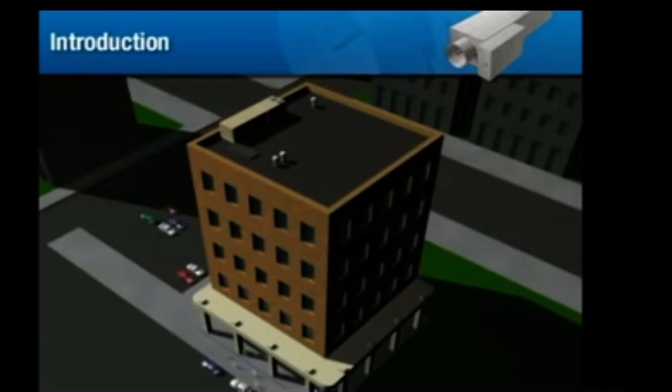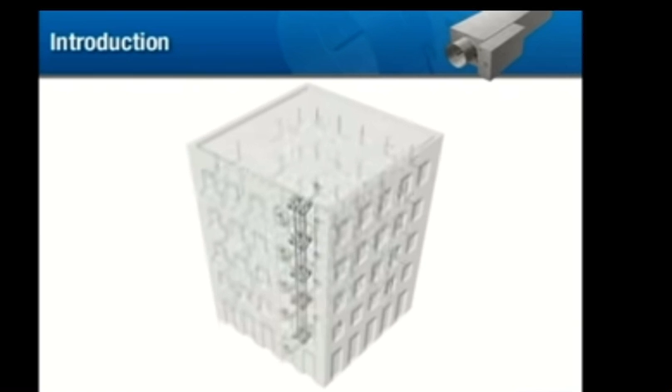The modern commercial or office building consists of many sophisticated systems. These systems include foundation and support structures, electrical and lighting, and plumbing and fixtures. Another major part of any building that is often taken for granted by its inhabitants is the HVAC system. HVAC stands for heating, ventilation, and air conditioning.

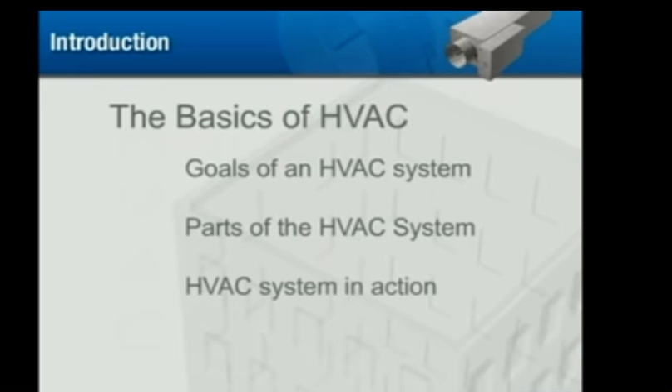In this unit, we will identify the purpose and goals of the HVAC system, describe basic HVAC parts, and describe how these parts work together.

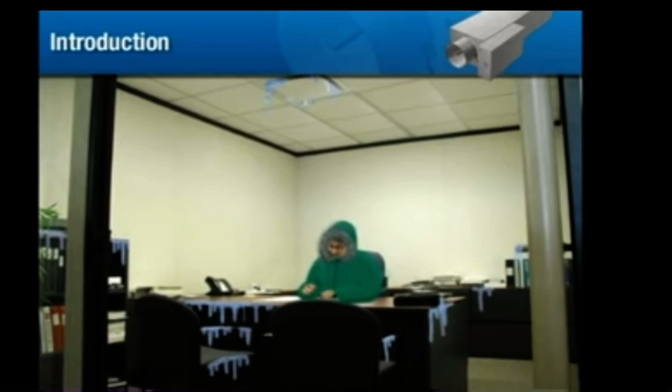Air quality is an essential consideration in maintaining the productivity, comfort, and health of the occupants and should not be trivialized. If air quality and temperature are not maintained, occupant comfort in the workplace can suffer, directly affecting productivity and morale.

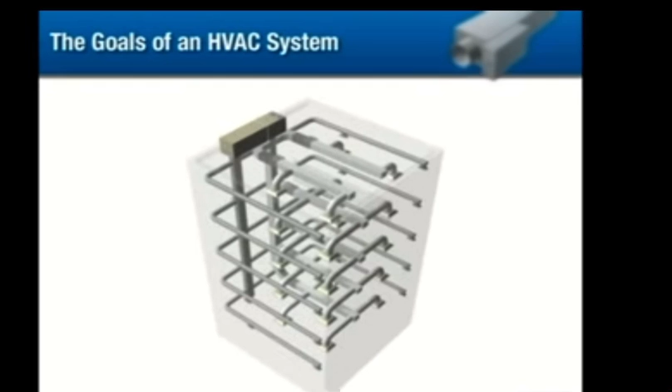The goals of an HVAC system. When examining the design of an HVAC system, we must remember the various roles that the HVAC system plays.

We all know that when we're cold, we turn the thermostat up for more heat, and when we're hot, we turn the thermostat down. So the HVAC system keeps us comfortable by adjusting the room's temperature.

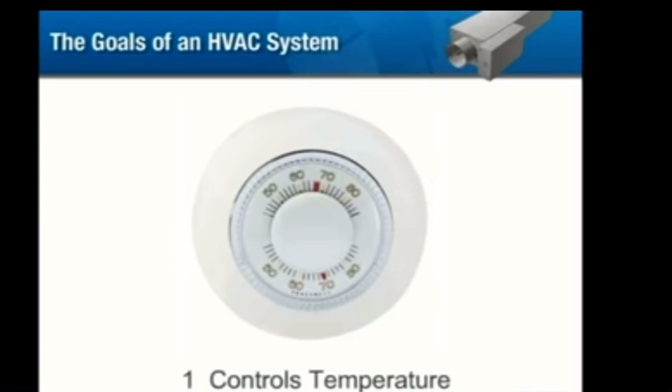But equally important, the HVAC system must keep occupants comfortable by supplying fresh air to a room. If we introduce a significant proportion of fresh exterior air and alleviate carbon dioxide buildup, occupants experience better health and performance gains. Studies have shown a direct link between CO2 levels and short-term sick leave in office workforces.

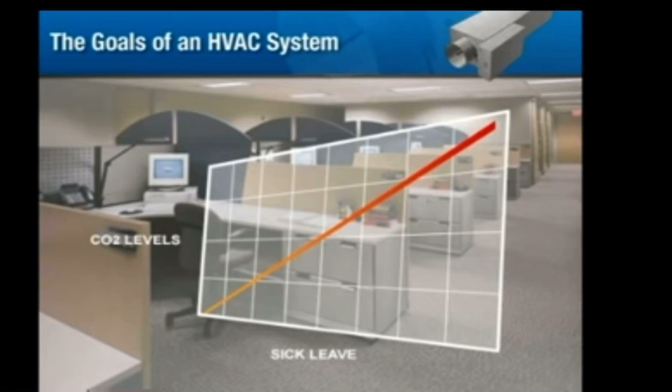However, our concerns regarding the HVAC system and occupant health do not end here. In heavily air-conditioned, energy-efficient environments, recirculated conditioned air can carry contaminants which contribute to respiratory illness. It is the HVAC system's job to remove contaminants and dust from the air using filters at various stages.

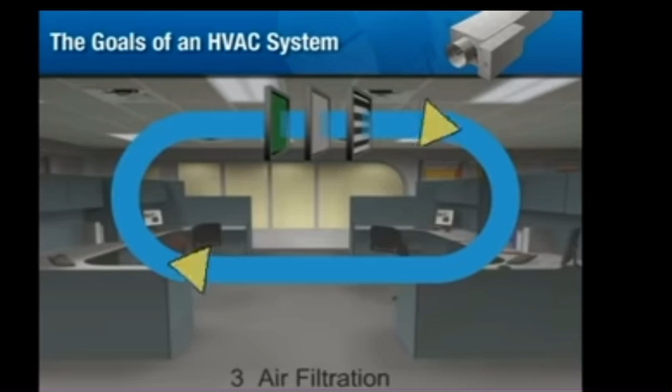As important as this consideration is in an average office or commercial building, this feature is critical in facilities that contain clean rooms, medical facilities, or hazardous materials.

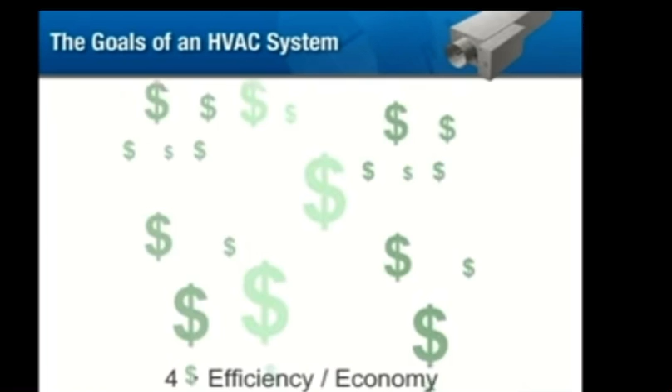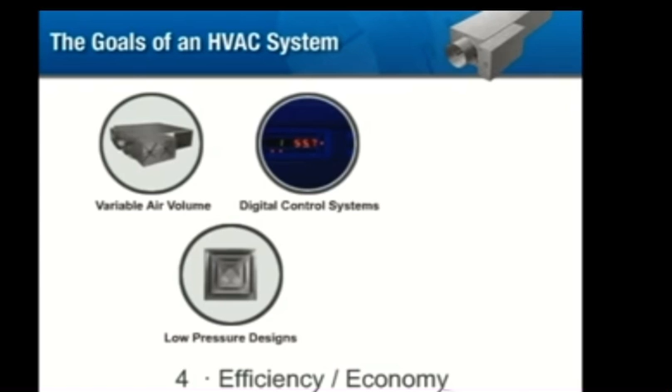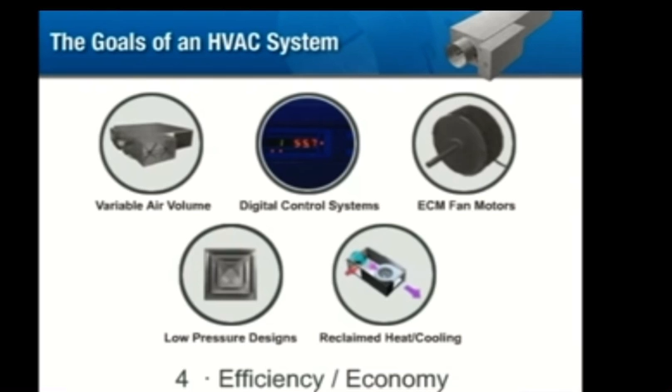Finally, with the spiraling cost of fuel, HVAC systems must also be efficient and economical. Energy-efficient HVAC systems might incorporate variable air volume designs, components designed for operation at low pressures, digital control systems, mechanisms for reclaiming heating or cooling benefits from recirculated air, and high-efficiency ECM fan motors. Many Price products are designed specifically with energy efficiency in mind.

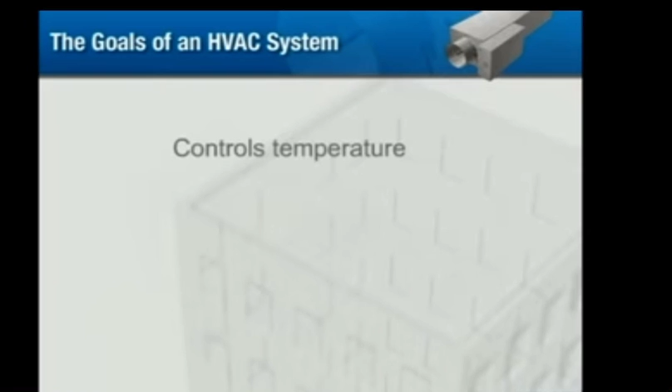By understanding the importance of occupant comfort, we realize the significance of the HVAC system in a building design. It's responsible for controlling the temperature in the environment, providing fresh air to the occupants, filtering out dust and contaminants, while operating in an energy-efficient and unobtrusive manner.

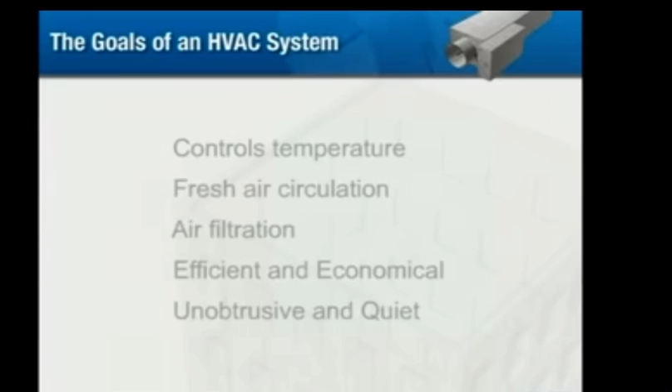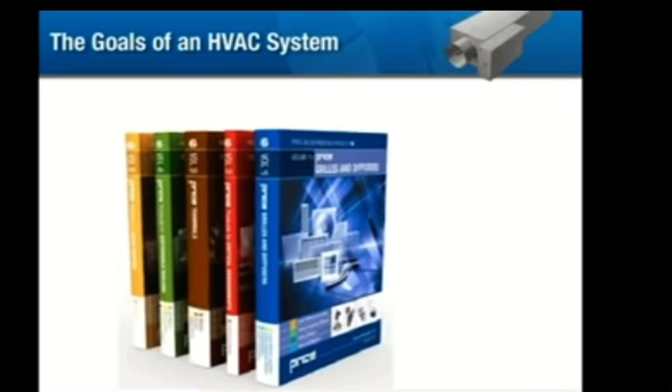The following section covers the different parts that make up a basic HVAC system. Once we understand the range of components involved, we can better understand the reasons for choosing system components from Price's extensive product line. The parts of an HVAC system.

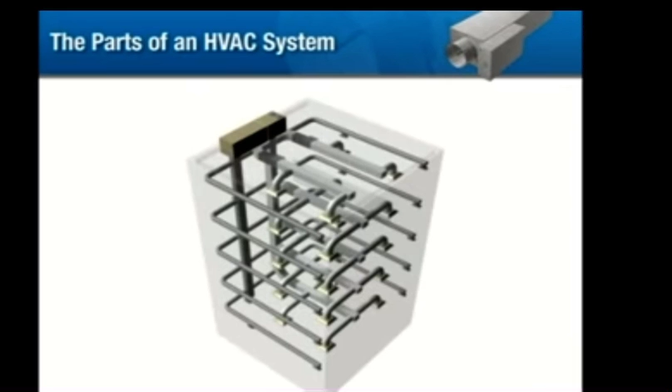The HVAC system installed in a commercial or office space differs greatly from the heating and cooling system that you might be familiar with in your house. In your home, your heating system is set up to deliver warm air during the winter and cool air in the summer. It does this using a furnace or an air conditioner and a common set of ductwork.

When your thermostat detects that your home is too cold, it sends signals to the furnace, which then delivers warm air simultaneously to all parts of your house.

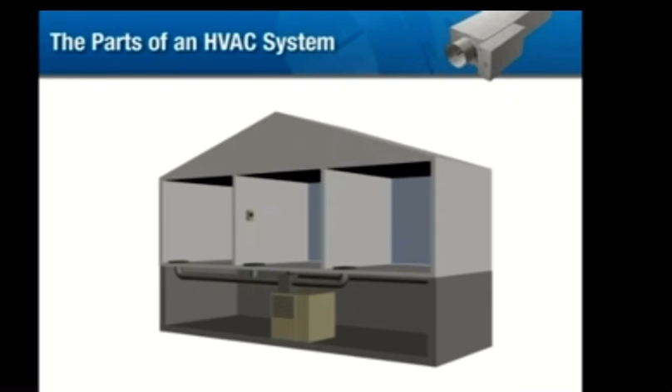Note that it is typical to have only one thermostat, and it does not account for temperature variation in any other rooms. Likewise, in the summer, your thermostat will detect when your home has become uncomfortably warm, and it will signal your central air conditioning system to deliver cool air simultaneously to all parts of your house.

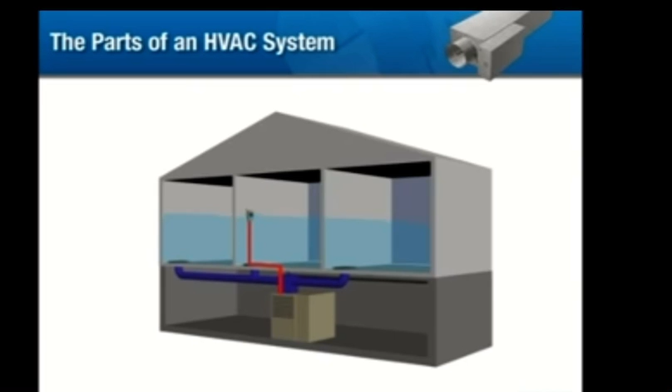Again, note that your thermostat is measuring the temperature in only one room.

The conditions in an office or commercial space are quite different. Higher concentrations of people and equipment will generate more heat, making air conditioning or recirculation of air more important than providing heat. Although the air handling equipment is centralized, different rooms and regions in the building will have different needs for heating and cooling. These needs are called loads because they place a load or demand on the HVAC system.

These loads can come from equipment, people, weather, and many other factors. In the simplest case, we address this by providing a constant supply of cool air, which is then managed by the HVAC distribution system.

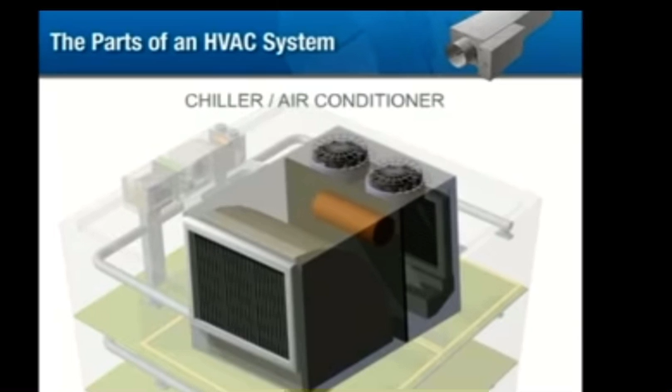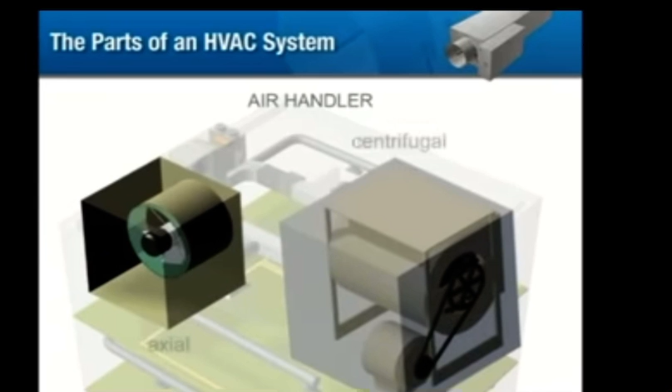The chiller or air conditioner utilizes heat exchangers and circulated fluid or gas to cool the air that is passed through it. The air handler is a fan or a blower that moves air throughout the building's ductwork. Axial or centrifugal fan types may be found in the air handler.

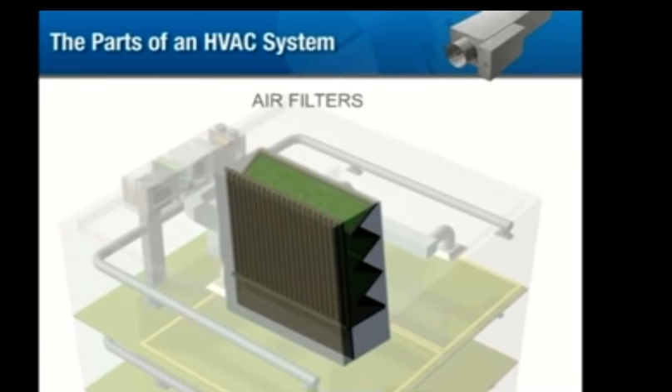Air filters: depending on the requirements of the occupants and the activities in the building, various grades of air filters are used in the system. General-purpose air filters will be included in the air handler itself, while more sophisticated filters, such as HEPA filters, may be used in the downstream ductwork.

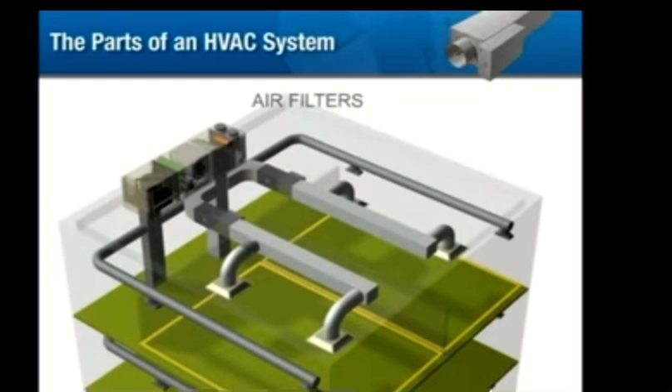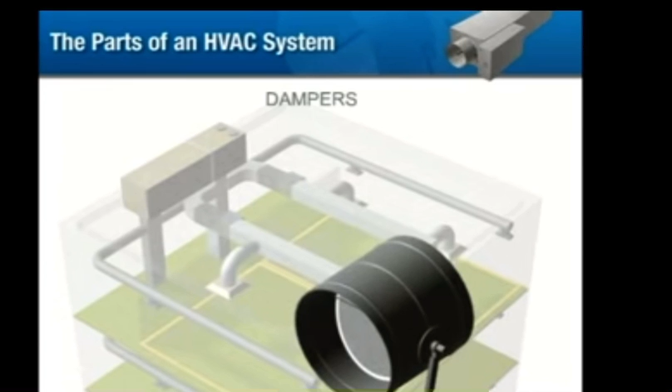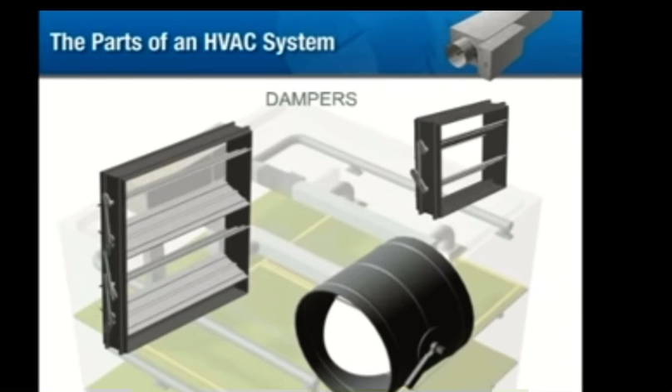Ductwork: round, square, and rectangular ductwork provides a path for the conditioned air from the air handling unit to the environment. A damper consists of one or more blades which can be used to control the amount of airflow through a duct. Manual dampers are used to ensure that different parts of the building receive proportional ventilation based on area and demand. Automated dampers may be installed at firewalls which close in the case of a fire.

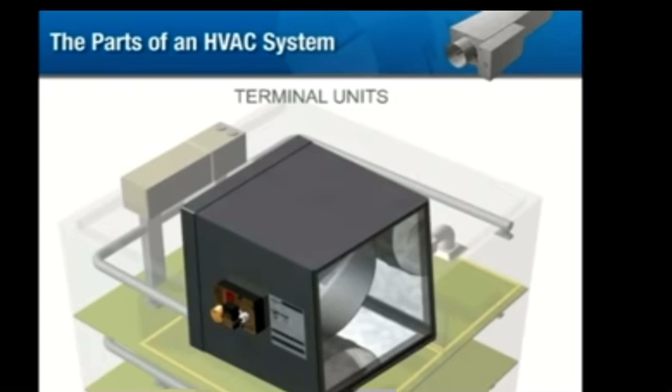A terminal unit is a device that uses an automated damper to control the amount of air which is delivered to a room or region. The damper is typically controlled by an electric, pneumatic, or digital actuator, which in turn is regulated by a thermostat.

A set of adjacent rooms or regions in a building which have identical heating and air conditioning needs are called a zone. It is typical to assign at least one terminal unit and corresponding thermostat to each zone. Price manufactures many different varieties of terminal units to suit all types of building needs. We discuss terminal units in greater detail in the forthcoming terminal units section.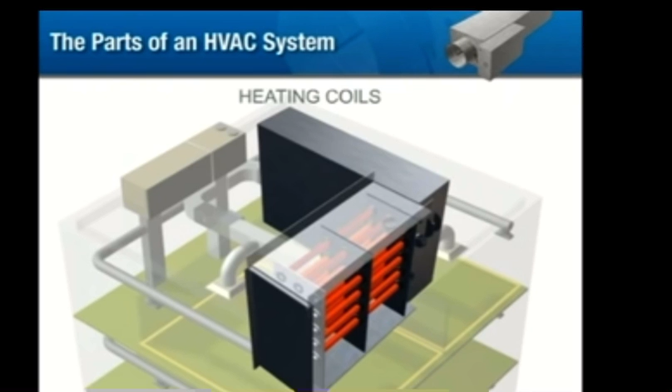Heating coils may be installed after a terminal unit to provide heat on a zone-by-zone basis. As mentioned previously, buildings with a high number of occupants may not require extensive heating even during the coldest months of the year. Heating coils offer an efficient way of providing heat for those few areas that require it and are controlled by the same thermostat system as the terminal unit.

Various types of linings are available to dampen noise within a duct. A short length of lined ductwork, called an attenuator, is often installed following the terminal unit to dampen discharge noise.

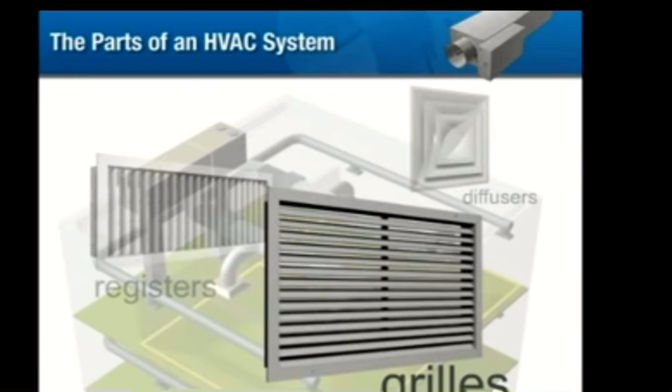Ultimately, the test of an HVAC system lies in its ability to deliver conditioned air to the occupant. Air from the ductwork enters the occupied space through grilles, registers, or diffusers, often called GRDs. The term grille is commonly applied to any air outlet or intake that consists of a square or rectangular face and neck, whose facial appearance is made up of louvers which may be used to deflect the air.

A register is a grille that has one or more adjustable blades or dampers that control the amount of air that flows through. A diffuser is an air outlet which incorporates structures such as vanes, louvers, perforations, and other features for distributing and directing air.

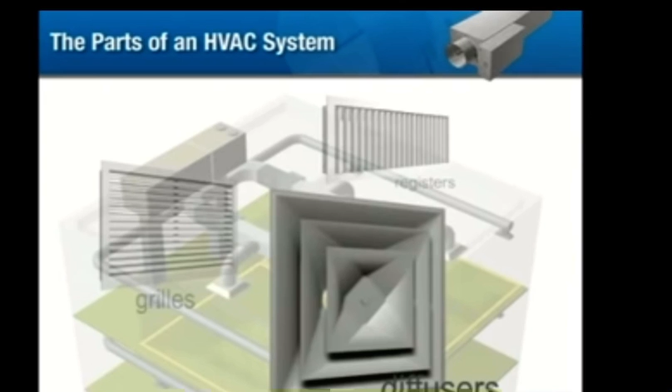The diffuser's job is to direct the airflow throughout the occupied space in the most efficient manner possible. More information on desirable air patterns is provided in the Space Air Diffusion section. We will discuss diffusers in more detail in air outlet selection.

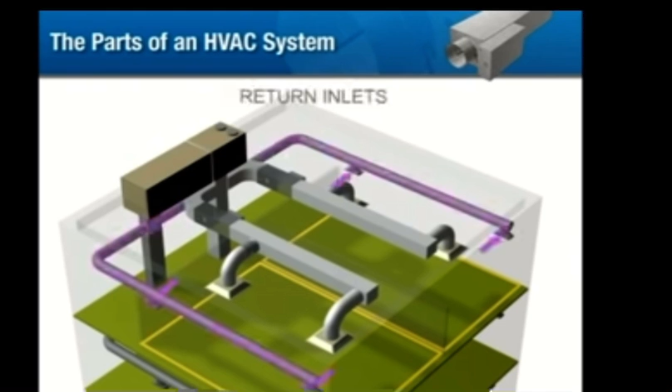Once air enters a space, where does it go? Air circulates through the return inlets and returns to the air handling unit. Unlike an air outlet, a return requires no sophisticated vanes. However, the relative location of the air inlets and outlets can be critical to the efficiency.